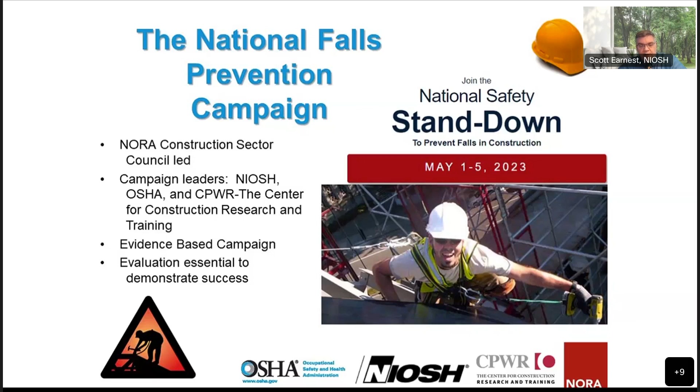It's an evidence-based campaign, and we also conduct periodic evaluations to evaluate various aspects of the campaign, and we follow an approach that looks at the levels of the hierarchy of controls.

Construction workers sustain high numbers of fatalities and injuries. Construction represents about 6% of U.S. workers, but 17% of occupational fatalities, the largest number of all industry sectors.

The Falls campaign began in 2012 when the Secretary of Labor, Hilda Solis, gave remarks at an event in Los Angeles. The campaign slogan is 'Safety Pays and Falls Cost.' The tagline is 'Plan ahead, provide the right equipment, and train everyone.'

This slide shows one of the first posters that we developed for the campaign up in the right-hand corner. We encourage construction employers to join the national campaign to prevent falls in construction and hold their own stand-downs.

A safety stand-down is a voluntary event for employers to talk directly to employees about safety. Companies can conduct a safety stand-down by taking a break to have a toolbox talk or another safety activity, such as conducting safety equipment inspections, developing rescue plans, developing job-specific hazards.

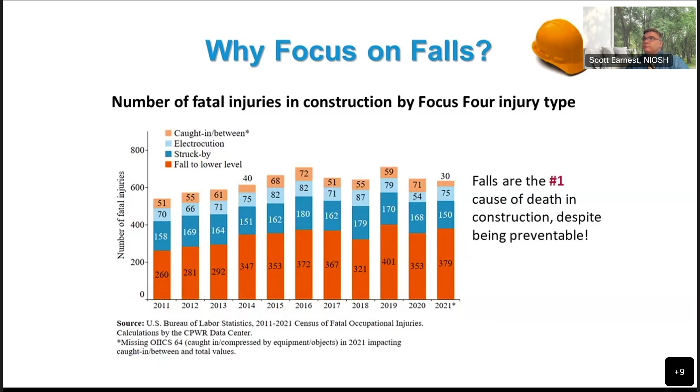Also wanted to briefly mention OSHA's top 10 list of violations. This is the list from 2021. The point I wanted to make is that if you look at this list year in and year out, it frequently includes various violations related to construction falls.

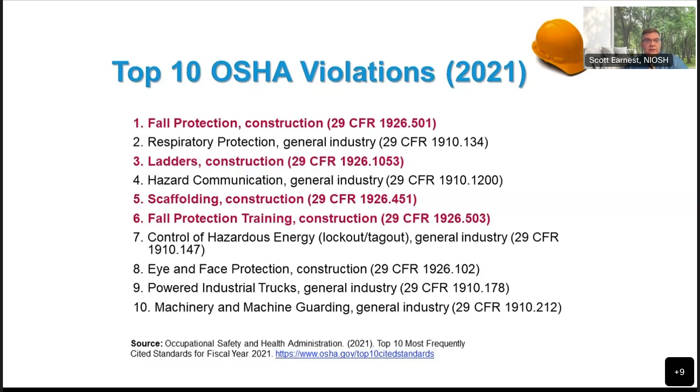In 2021, the #1 violation was fall protection, violations of 1926-501. #3, violations related to the use of ladders, 1926-1053. Fifth violation, scaffolding. Sixth violation, fall protection training. So again, year after year, there continues to be problems within the industry and violations of OSHA standards.

Now I wanted to talk a little bit about prevention through design. Prevention through design is a comprehensive approach for addressing safety and health issues by designing out hazards and minimizing residual risk.

The prevention through design mission is to prevent occupational injuries, illnesses and fatalities, and exposures by eliminating hazards and minimizing risks to workers in the design and redesign of facilities, work methods, processes, equipment and tools, and products, including new technologies.

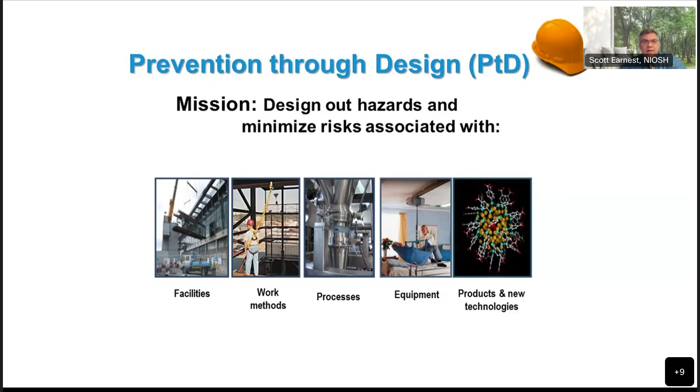The aim is to eliminate hazards and control risks to workers at the source, or as early as possible in the life cycle of a workplace. The impact of project planning and design has been found to influence safety on construction sites. Studies of injuries and fatalities suggest that many of the reasons for incidents can be traced upstream from the building process itself and are connected to planning, scheduling, and design of the facility.

The NIOSH director, Dr. John Howard, said anticipating and designing out hazards in tools, equipment, processes, materials, structures, and the organization of work is the most effective way to prevent occupational injuries, illnesses, and fatalities. And this is supported by studies.

In 1994, Jeffrey and Douglas reviewed construction industry safety performance in the UK and concluded that 35% of the site fatalities reviewed were related to falls and could have been prevented through design decisions. Using OSHA and NIOSH fatality reports from 1990 to 2003, Professor Mike Behm linked design to fatal injuries in 92 of 224 NIOSH FACE reports, or roughly 42% of the total.

And in a study of the relationship between design and work-related injuries in Australia from 2000 to 2002, Driscoll found that there was either a definite or possible connection to design in 63% of the 43 cases reviewed.

This next slide, and the next several slides, provide some examples. This is a photo taken by a former colleague of mine, Matt Gillen, that shows a worker servicing a rooftop heating, ventilating, and air conditioning system. It's an example of why prevention through design is needed. This worker's on the building edge with a clear fall exposure.

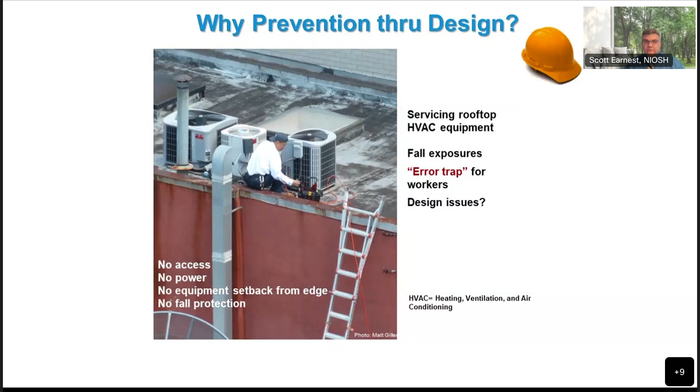This partnership resulted in U.S. industry-wide efforts to design, lab test, field test, and validate engineering control modifications to highway class paving machines to reduce exposures. The industry partners signed a voluntary agreement with OSHA to include these ventilation controls on every U.S. manufactured highway class paver, affecting the whole industry. This is an example of prevention through design using equipment.

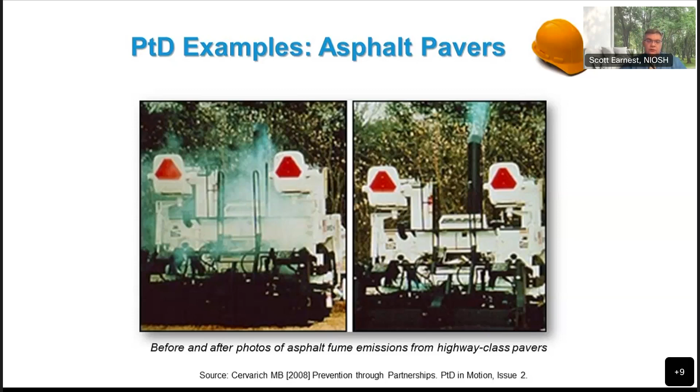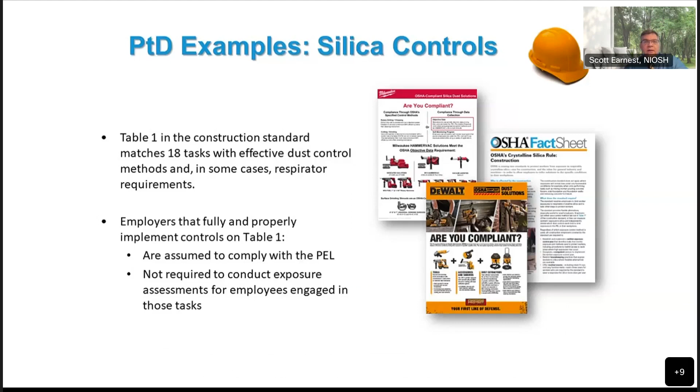Another example relates to silica and the use of powered hand tools. OSHA developed Table 1 of the silica standard based upon silica control research. This table provides a list of control options to reduce hazardous silica exposures for 18 different tasks. This is a popular table now and will likely be expanded. These controls are now being implemented across the construction industry. It's another great example of PTD that's resulting in fewer hazardous exposures.

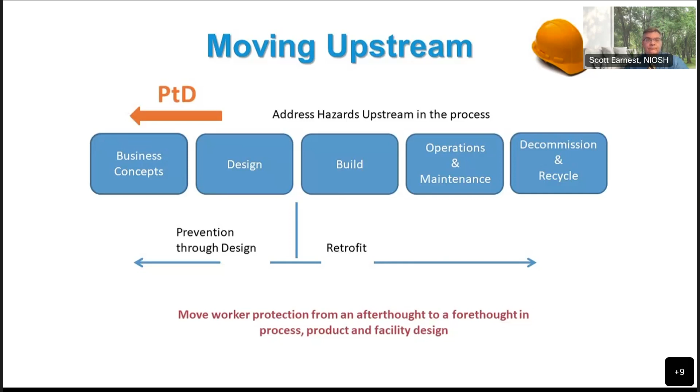I also wanted to mention that prevention through design is not new. Believe it or not, it was actually mentioned in the Bible, Deuteronomy chapter 22:8. It says, when you build a new house, you shall make a parapet for your roof, so you may not bring the guilt of blood upon your house if anyone should fall from it. I think this was written in 1406 BC, obviously a really long time ago.

Prevention through design is also widely used in many other countries and has been regulated for 30 years in the United Kingdom. It's also sometimes referred to as safety in design, inherently safe design, construction design management, or design for safety.

So what's the motivation for PTD? Well, PTD is consistent with the hierarchy of controls and targets the two highest and most effective levels of the hierarchy. At the top, the most preferred approach is to eliminate the hazard or exposure by designing it out. If this isn't possible, the next approach is to substitute a safer alternative. This is followed by engineering controls to isolate or guard the hazard, and continuing downward. The next is administrative controls, followed by the least preferred, personal protective equipment.

Another motivator for me personally is the issue of falls through skylights. NIOSH published an alert 30 years ago on this problem, and it remains a problem to this day, and it's preventable. When the alert was published, there were 8 fatalities from falls through skylights in just a period of a couple years. With that, I'll go ahead and turn things over to Bill Wright, Communication Director at CPWR.

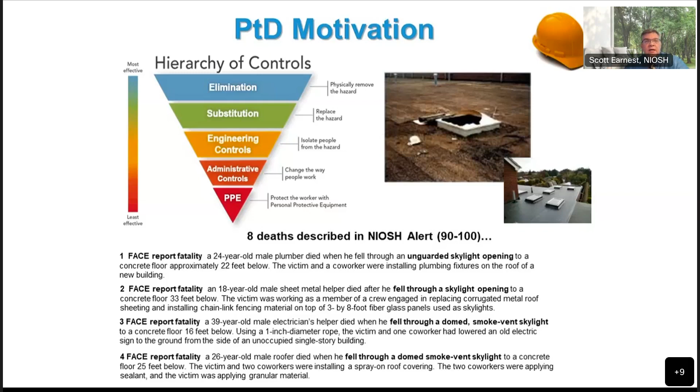Thank you, Scott. Scott's laid out really well why CPWR is interested in PTD and why it fits so well with our mission of preventing injuries, illnesses, and fatalities. And given what he's laid out, you can see the benefits of PTD.

We were curious, what's the state of PTD knowledge in the field? How are people using it? And what are the barriers to broader adoption, since it is such an effective way of keeping workers safe on the job? To investigate that, we did some research about a year and a half ago. There were really 2 parts to it.

One was a quantitative survey we did with our colleagues at Dodge Data Analytics. They have a really good pool of pre-construction professionals, architects and engineers. So we designed a survey to ask them some questions about PTD. And then to complement that, we did interviews at CPWR, led by my colleagues Babak Memarian and Sarah Brooks, to go into more detail to see what kind of enrichment we could get out of the quantitative study through these qualitative interviews.

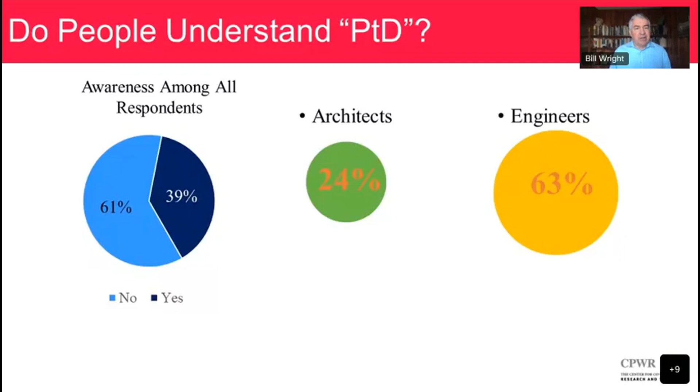First thing we wanted to know is, how do people understand PTD? Or maybe put a different way, do people understand PTD? You'll see that the pie chart on the left says awareness among all respondents. What we did was we read a definition of PTD from NIOSH, very similar to the one that Scott read a few minutes ago from Dr. Howard. When we read that to the pre-construction professionals, and when you see numbers in this presentation, those all come from the quantitative survey, you'll see that only about a third of the people were aware of that definition. And there was some variation between architects' level of familiarity and engineers.

In the interviews, we decided we wanted to know a little bit more. So we actually asked people to define prevention through design. I'll give you a second to read what they said, to give you a sense of the different approaches or the different concepts people have for this idea.

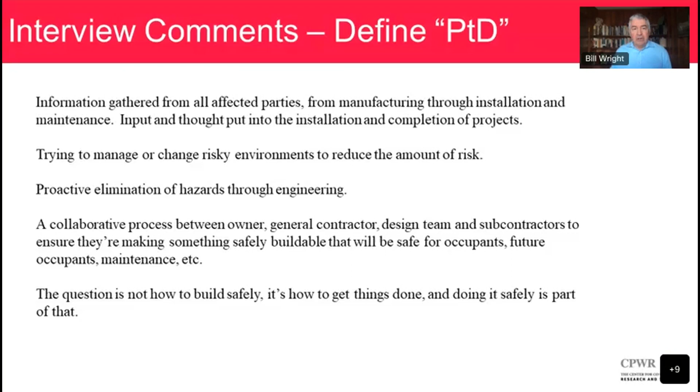As we were preparing to do this research, we realized that we didn't really want to get hung up on language. In other words, maybe people are using PTD, they just don't refer to it that way, or as safety by design, or some of those other phrases that Scott mentioned a few minutes ago. So we wanted to ask about some specific practices that would count as PTD, but that the people we were surveying might not necessarily make that connection to.

So we identified, you can see there's 5 topics, 5 approaches on the left. And we asked, well, do you use these techniques, to the engineers and to the architects? You can see that either sometimes or frequently, several of these are quite often used.

If you're wondering why there's a separate column for engineers, one of the differences we noticed in the responses to the quantitative survey was that in the first topic, identify opportunities for prefabrication, there wasn't much variation between the architects and the engineers. But in the 4 subsequent choices you can see there was a noticeable difference, that the engineers were more likely to say this is something we try to do when we're creating a building.

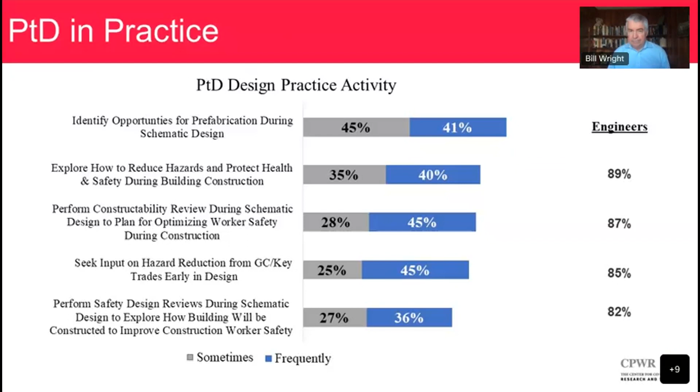One of the other pieces of data we got was comparing what people said they did in terms of using PTD versus when we asked specific questions about those 5 approaches. Particularly among architects, there was a big difference between what people said and what they actually did—the actual use was much higher, which was encouraging, especially if we're trying to encourage more use and people are already adopting some of these methods.

One other thing I want to mention, and you'll hear more about this shortly, is that we asked in the interviews what sort of PTD techniques people use. Falls protection was the primary one, showing up more often than anything else. We also got several mentions of prefabrication, so people did have specific answers about how they were approaching PTD.

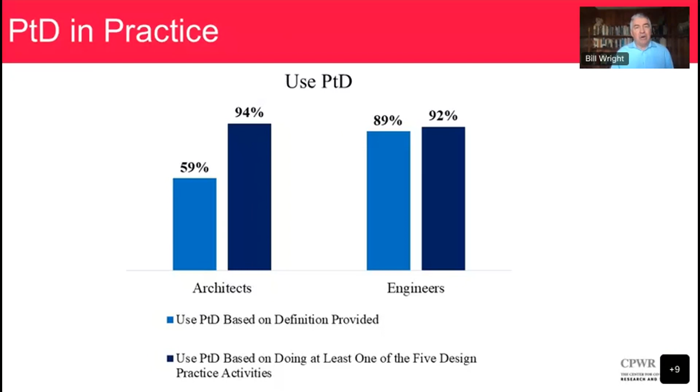Given that PTD can be really effective, we wondered what the barriers and obstacles to broader adoption are. You can see here how architects responded versus engineers. Let me give you a minute to look at these. You'll see that while there's some variation, there's a lot of overlap between the barriers for both groups, particularly the mention of liability, which people also volunteered in the interviews.

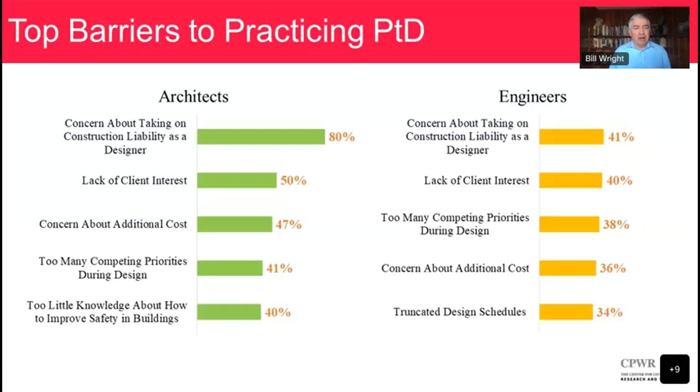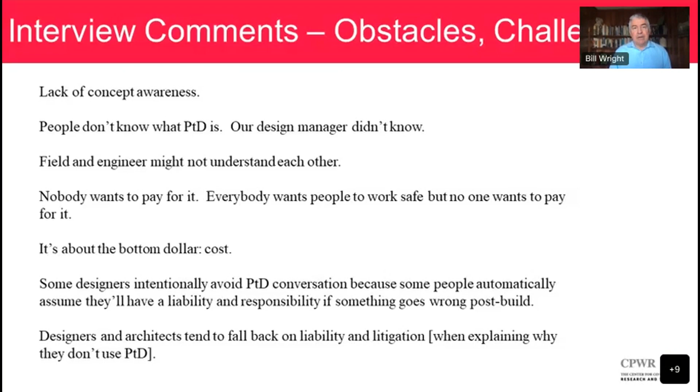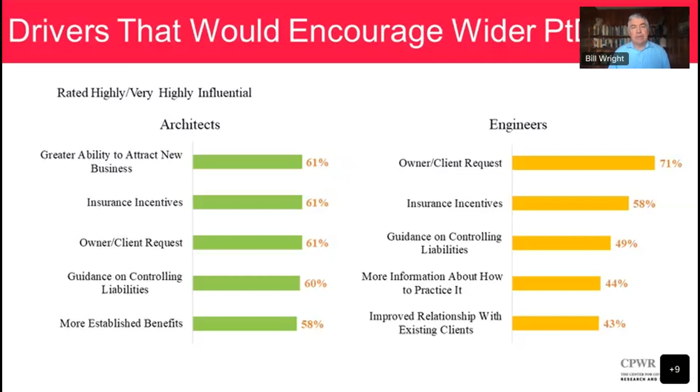Finally, we wanted to know what people thought would help encourage PTD use. I'll let you read this for a moment—the answers aren't very surprising given what we've learned from our research over the last few minutes. But the theme is that people really want to know how this is going to benefit their work, which is understandable, and that can take a bunch of different forms.

That concludes my presentation. Happy to answer questions when we get to that part of the webinar, but let me now pass it to Bob.

Thanks a lot, Bill. I'll introduce myself a little bit. I'm the manager of health and safety by design for Jacobs Engineering. It's my job within Jacobs Engineering to champion safety in design so that we can allow construction to be safer as we go through our design builds.

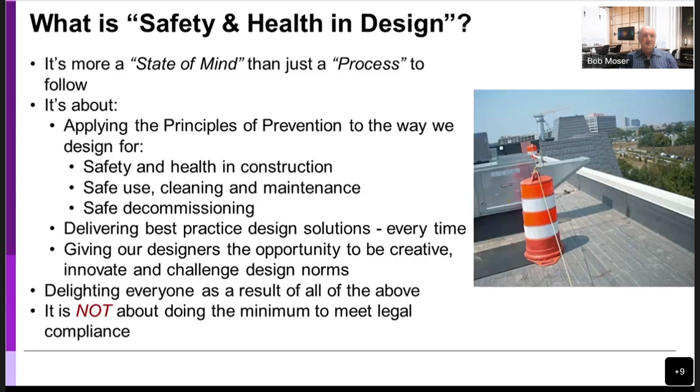Like for instance, in the parapet example, designing a proper high enough parapet to protect the personnel that would be working on that roof. And also to be able to get that parapet in at a time and schedule to where you're going to help the construction personnel not be able to fall early on in the project rather than later in the construction.

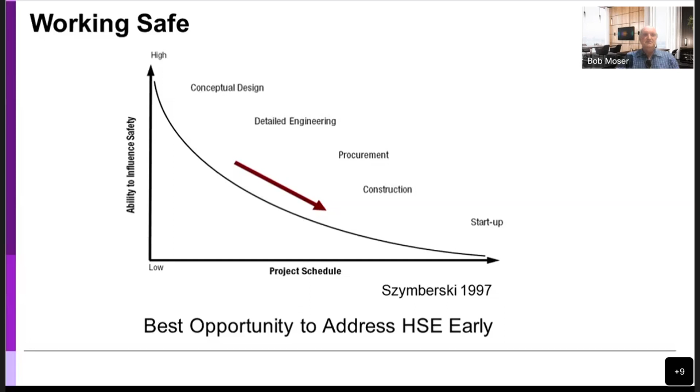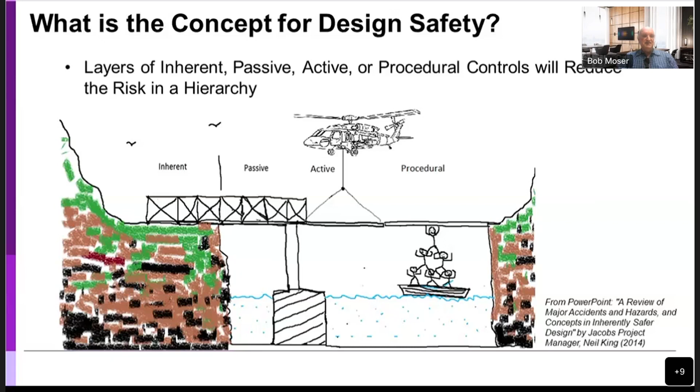So a lot of times in fall risk, a lot of the protection is within the procedural realm. Like you have fall protection that you're wearing - you can put that on wrong, you can make a mistake. So that's why procedural controls are not quite as good as the active, the passive, or the inherent. So this is something to think about when you're actually designing, because it allows you to see if you can get it more over to that left side of the inherent type safety.

So a lot of times, protection through design and inherent safety and health and safety by design, those are concepts that are wonderful, and we like to be able to do those concepts, but a lot of people always ask me how. Well, how do you do it? So I can give you some examples within our company of exactly how we make sure that we're designing for safe design down through the construction phases.

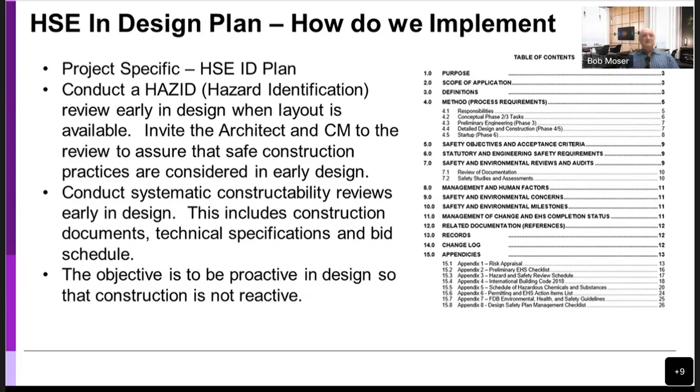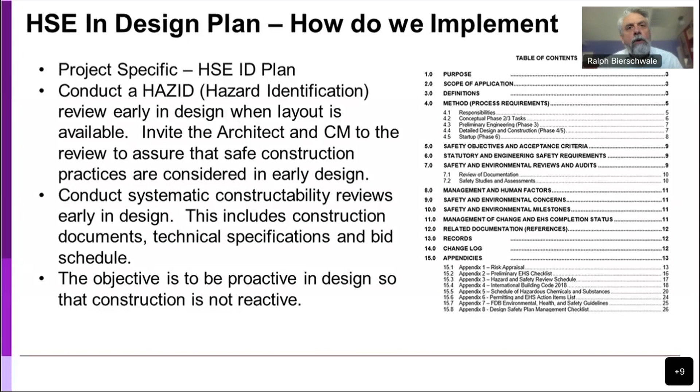Thank you, Bob. So Bob and I work at an architectural and engineering office in Conshohocken, Pennsylvania, focused on the life science business. So our projects are primarily based on pharmaceutical manufacturing buildings, which includes warehousing, laboratories, office buildings, and other support buildings like shops and things like that. So commercial construction is what we're typically focused on.

A lot of our clients have a strong safety culture, and we bring our own safety culture to it. So there is often support within our community to continue to advance and improve our safety culture. Within the company, we talk a lot about design with the end in mind, with the idea that we're thinking about the people who are going to occupy the building and occupy it in a safe manner, be able to maintain it, access things and the like.

In putting this presentation together, I thought we should also be thinking similarly about designing with construction in mind and how we can make the environment for contractors safer as they're building the facility. So as Bob just mentioned, we make hazard identification part of our normal design planning process. And that means, what does that look like?

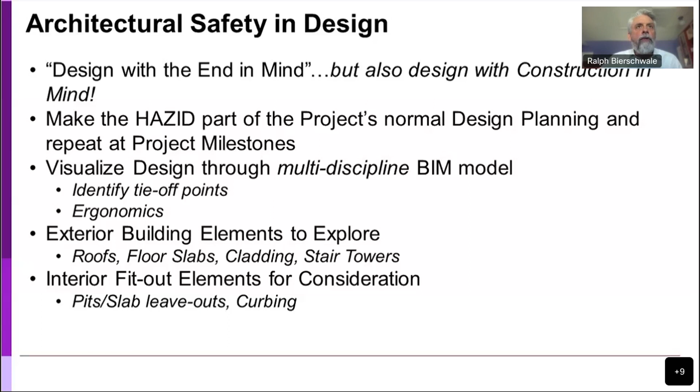So what I'd like to explore as some examples, brief examples, are exterior elements and some interior elements, and I'll explain as I continue. So, I'll continue beating the parapet, but parapets are important, and there's a lot of ways to prevent falls. You can have railings, you can have tie-offs, but the parapet is the gold standard.

And if you look at building codes, they're not uniformly the same. OSHA likes to see 42 inches for a parapet, but you're not always required to design to 42 inches. We do because that's really what you want to do.

If you understand how a roof is designed to allow for drainage to work properly, roofs, even flat roofs, have pitches to them. So the parapet actually needs to be 42 inches, ideally at the high point of the roof. There are places where the parapet might be considerably higher, but at a minimum it should be 42. In the design process, it's very easy to lose track of that. You could make it 42 at a low point, and then you'd have a lower parapet in areas where you don't want it. It's a simple mistake that people make, and I think it's an important one to be wary of.

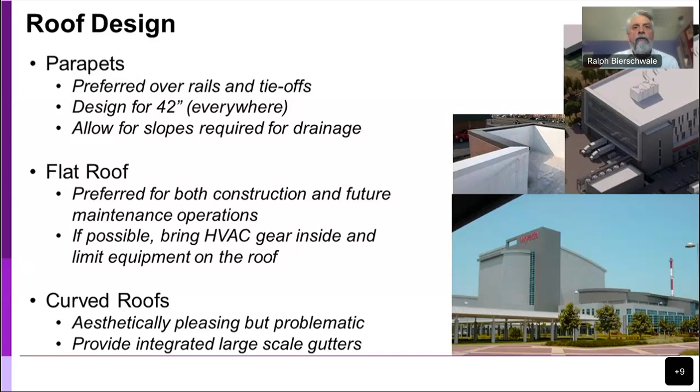We went to flat roofs after that. So, another example that I wanted to bring up, and this doesn't work for every building typology, but for elevated slabs, this may be more in the category of tripping and falling rather than falling from height.

But there are significant risks associated with pouring slabs on elevated levels. Metal deck itself, rebars, studs, pouring concrete, dealing with shoring - all of those things, as you can imagine, walking in wet concrete represent falling risks, especially if you're at the building's edge, but even in the middle of the building where these workers are working, for instance.

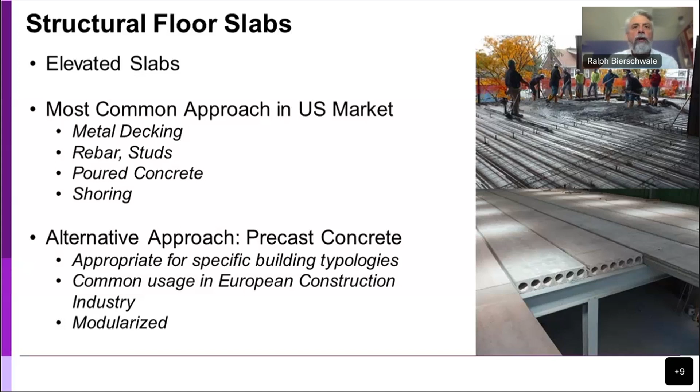An alternative approach for certain typologies is to use more precast elements, and that was one of the themes that we saw earlier on in the presentation. We see more of this in our European operations. We do work all over the world, and they're more likely to be using concrete elements like the ones pictured here. They're used often in office buildings, hospitality work, and the like. Less so for manufacturing buildings that we're involved in, but certainly some of those buildings could be done in a more prefabricated way, as is illustrated here.

And so again, going back to the methodologies of construction, oftentimes we look at using insulated metal panel and curtain wall, and those are often stick built. So you're putting up girts, going floor to floor. There's a lot of work at the building's edge, with a lot of people in bucket trucks and things like that.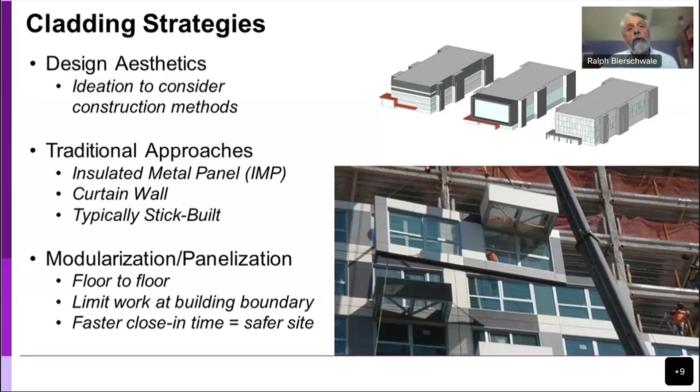Lately, along with our construction managers, we've been working with industry to do larger panelized facade elements that can be delivered on site, secured quite quickly, and improve both our schedule and our close-in time. The sooner you get that building closed in, the safer the site's going to be, the less work you have at the building's edge from both inside and outside. I think this is becoming quite a common practice, and it certainly is to be encouraged.

So a modular stair tower, this came up in a construction review of a project that we're working on currently in North Carolina. It was a clever idea to modularize the exterior stairs and deliver them so that we wouldn't have to have scaffolding on the building's edge prior to the stairs being built on site, stick-built or otherwise. An important thing to take into account here is schedule.

This was a really smart idea, but our prefabricator wasn't able to get the stairs there as early as we would have liked, so there was scaffolding and then there was a stair. It's important to schedule things like the stairs to arrive just as the steel arrives, so that you can have the safest possible way to get to elevated slabs rather than using temporary structures.

Along a similar theme with regard to stair towers, we like to include windows in the stair tower itself. Even after you've clad the stair tower, oftentimes it takes a while until permanent lighting is put in, so temporary lighting can give you lots of weird shadows, and sometimes it's not put in on time. Windows in the stair tower provide an added layer of natural light to help you see where you're going.

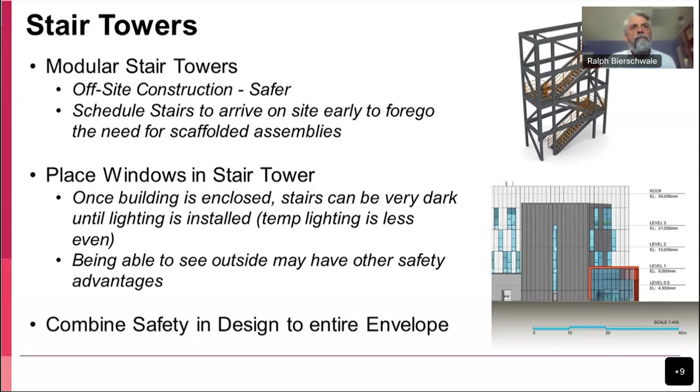As you go into the building further, there are some industrial-type details I wanted to point out. One is pit-mounted equipment like scales. We encounter quite a number of these in any of our installations to weigh IBCs or other materials coming into a warehouse or into a production room.

These can be either pit-mounted, flush with the floor, or they can be placed on a floor with a small ramp on them. They both have their advantages and disadvantages, but we prefer to put them onto the floor so that the pit itself doesn't become a tripping hazard during construction and a cleaning problem later on in design.

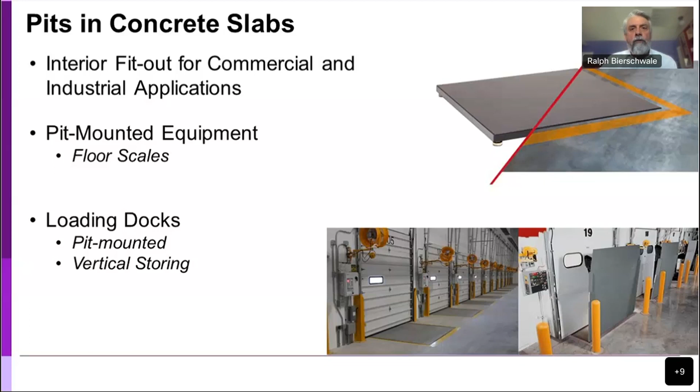In operation, if the door opens up, you have a 4-foot fall to the outside, whereas the vertical storing leveler on the right—even if the door was opened inadvertently—would prevent you, and certainly a fork truck, from falling off the loading dock, which is a common problem.

We've been more and more ordering equipment this way to prevent that small amount of extra tripping that can happen after the fact during maintenance operations.

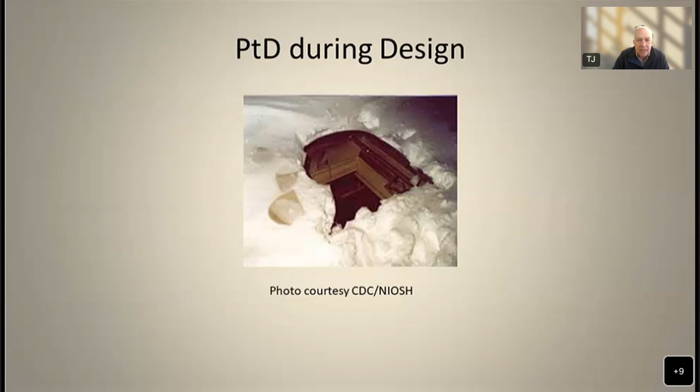So again, any examples you're looking for on better ways to do this, please let me know. But they now make skylights in the United States you can't fall through - step one to getting ahead of people getting hurt.

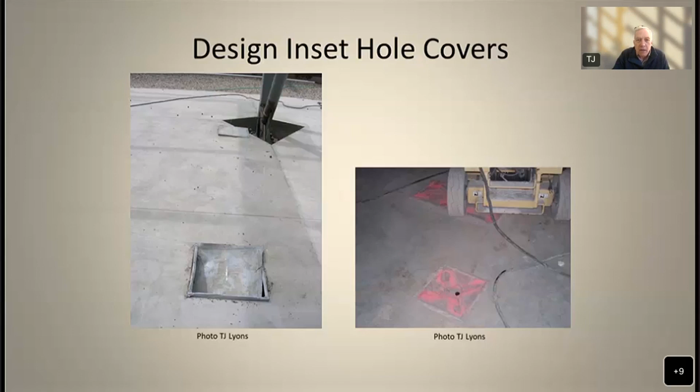Some of these interventions are fairly simple, but going back to earlier conversations, you really do have to be involved in the design phase of a project to make this work. But once the subcontractors and the people putting the building together understand it, it's just a great way to do it - it goes a whole lot faster, and there's absolutely no maintenance on this compared to a regular hole cover. They'll listen very closely. It's just another example, this one on a steel deck - it's put in place, and this thing is not going to move.

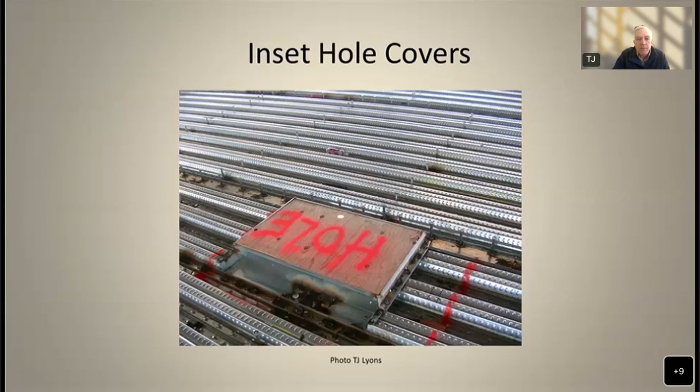Very well thought out. This is planning at its best, and this is also prevention through design at its best. Now you're going to see a few more examples of exactly this - things we need to start putting in the contracts and the additional provisions, as we used to call them, so the contractors know what's expected versus trying to change their habits halfway during the project.

One of my favorite stories - we talked about a slope roof earlier. This is an aircraft hangar on an Air Force base I was working at, and the contractor was very worried about how they were going to fall off the roof, and they were going to buy about $22,000 worth of fall protection gear. And I said, well, aren't you guys going to point up the building? This is a concrete stone building. Yes, we are. I said, well, if you're putting up scaffold, why don't you just put the scaffold one layer past the rooftop? It was incredible - we ended up winning an award for this.

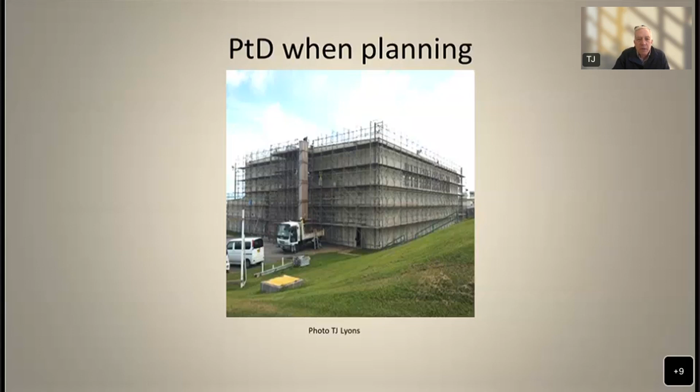But again, some of these interventions aren't necessarily things - it's how you put the work together. Prevention through design isn't just something to look at early in a project as far as how the building's going to look, though I'm a big fan of full parapets, and probably more on that later. It's actually about how you put the work together. You can really prevent a lot of injuries by just simply looking at how we do the work, because we have to do it differently to kind of win the war. In falls in particular, we're not - but some of these simple interventions where you can't fall off a building and do the work probably two or three times faster, that's what's going to save some lives in the construction sites here in America.

One of the cool things about PTD, and this is again why I enjoy it - there's not a lot of cost in many of the things we do to make it safer.

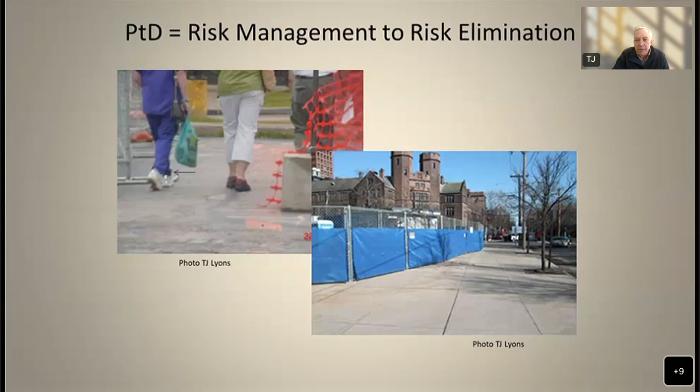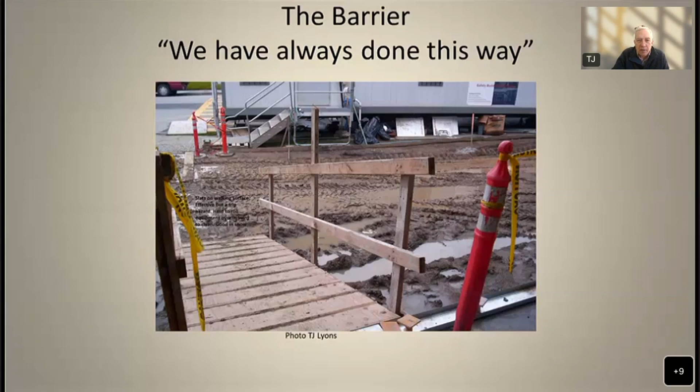When I hear, hey, we've always done it this way, I typically listen a lot closer. This is a really nice ramp - I took this picture in California on a great site. But again, as you get on here, people are going to trip, and you can't push anything with wheels across it, right? This was a good idea at the time, maybe 10 or 15 years ago. But there are some new products I want to share, new approaches to things we should be doing on every site. Again, if you put these simple interventions in a contract, a construction project contract, and make sure it's bought out by that particular contractor, the carpenter, whoever, you will really find a great advantage in eliminating a lot of the falls and trips on your projects.

Very few people are aware of this unless you're on very large projects like a Google or some of the Jacobs jobs, but the material on the right is something called Skudo mat. Skudo looks like a Scotch-Brite pad - you can't slip on it, period, and that's what I love about it. It comes in sheets or rolls. The photograph I took on the right, I took in Nashville on a very cold morning - that's frost on the steps. If that treatment had not been on there, the first person off those steps would have probably fallen, right? There's no reason he wouldn't have.

When you put this material on, which is fairly inexpensive compared to a fall, you move from risk management, which is when you put up a sign that says watch out, slippery steps, to risk elimination, where you eliminate the hazard—something we truly need to spend more time doing in construction.

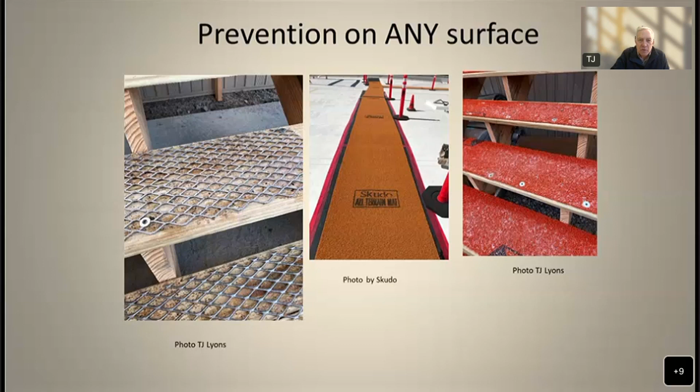Now on the left-hand side, something we've been doing for years, right? This is stamped metal—you put it on ramps, you put it on steps. There's no way you're going to slip on this step, but if you maintain it, which is important, you can eliminate falls from any of these surfaces. What I'm advocating, by the way, is across the board: if somebody has slipped on something once, they're going to slip on it again.

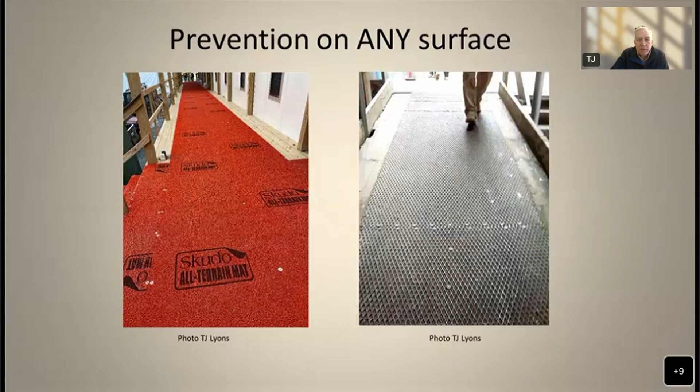And when you put it on the right-hand side, like on a ramp at a construction site—this is in New York—you've really moved along and you're setting the standard for preventing falls by how you design the workplace and, in fact, the working surfaces that we ask people to work on. Just two other quick ones here.

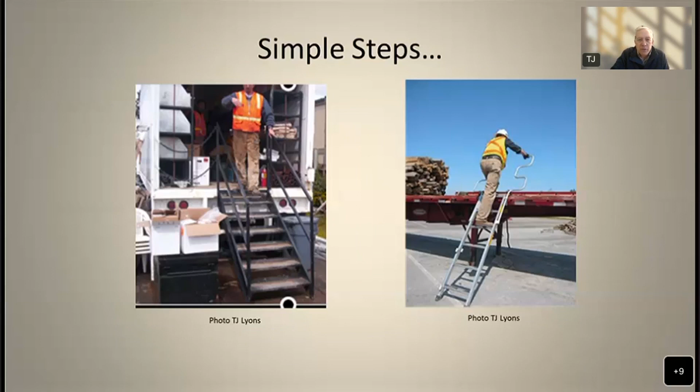Very common, but something we don't think about until somebody falls off a flatbed loading steel or off the back of a truck used to store materials on a work site. The ladder on the right actually came from the truck driver—he brought it because he had fallen off a truck in the past, so he brought his own ladder. They're made in Arizona, if anybody's interested.

Something I'm a huge advocate of—coming up with the idea of 'ladders last' years ago—is getting them off the workplace. On the left-hand side, if you're the first guy up in the morning with muddy boots, everybody else going up there gets mud on their hands.

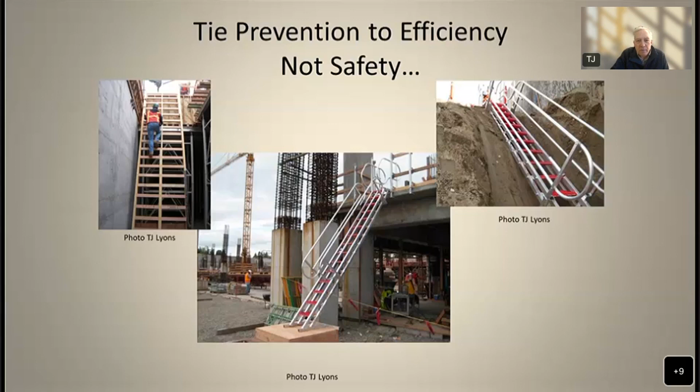But these ladders on the right-hand side, either for excavations or getting to upper levels, let you move folks about two times faster. You can go up with a lunchbox. They're reusable, recyclable, and you can get LEED points for them on construction sites. If you can get LEED points for something on a construction site and it's safer, it's a win-win for the people building these buildings and also for the owner.

One of the last tips I have—too clever, too simple, too easy—I found this in California. When you're walking across rebar mats, you tend to have to watch every step you place. What they started doing here is putting down what's called a sidewalk screen, a very lightweight screen, so you can walk across the surface. When I interviewed the folks working on this project, they said they were working about twice as fast because they didn't have to watch where they walked.

Again, one of the things we really need to get ahead of is 'we've always done it this way'—we need to think about how we should be doing the work, especially in the interest of keeping that worker safe from a simple fall.

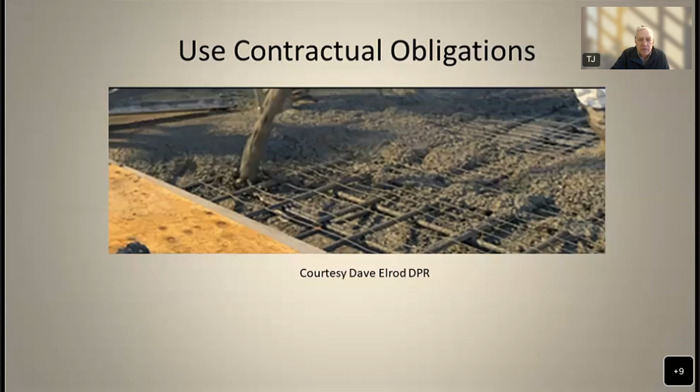Last, one of my favorite examples: on a project where the site was about an eighth of a mile away, we paved it—so they had a nice, easy way to get there. They're not going to slip on the mud, and they're not going to bring mud into the building. It's a simple process. Again, if anybody wants details on this, let me know.

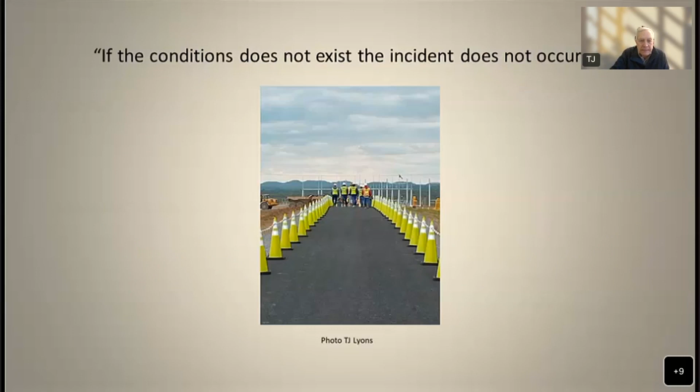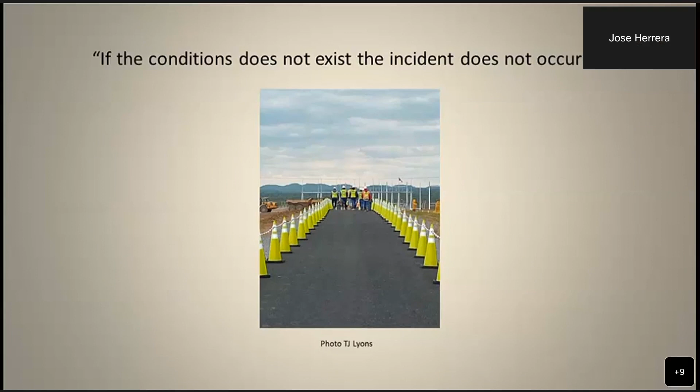Hello, my name is Jose Herrera. I work with the Directorate of Construction at the National Office of the Occupational Safety and Health Administration, and I'll be presenting some resources available on OSHA's website and from our counterparts who have gone through great lengths to draw attention regarding prevention through design.

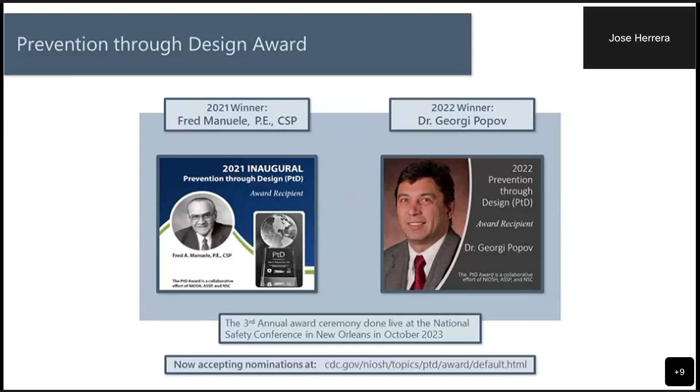NIOSH developed the Workplace Solutions series as useful job aids to put ideas into practice, such as preventing falls, designing out hazardous noise, and a general guide to demonstrate the business value of prevention through design's hazard control.

NIOSH has educational slide decks available also. These can be downloaded for free by anyone. They include many photos and instructor notes. Here are a few examples: architectural design and construction, structural steel design, mechanical, electrical systems, and reinforced concrete design.

NIOSH directly contributed to prevention through design chapters, homework problems, and case studies to over a dozen key textbooks. And it's encouraging to know that many more textbooks are including PTD methods and principles.

Research establishes the value of adopting PTD interventions, addressing existing design-related challenges, and suggests areas of future research. The research focuses on design factors that effectively reduce occupational injury and illnesses by collecting and analyzing data that assesses the impact of these prevention through design factors, as well as economic and business issues, such as financial analysis of PTD impact on the business process.

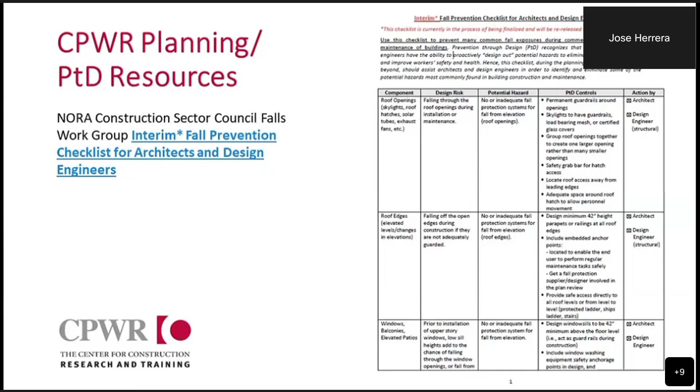CPWR has assembled planning resources that focus on fall prevention, fall protection, and fall rescue, and those are all available on stopconstructionfalls.com. A full written fall protection and rescue plan template is available in English and Spanish.

And for smaller contractors who may not have the capacity to complete such a large document, there are smaller and concise guides available.

And finally, we'd like to draw your attention to the fact that CPWR has a number of other hazard-specific planning resources that can be used by employers to think through risk reduction well before construction ever begins.

An example is the Best Built Plans program, which includes a planning tool and supplemental resources to help contractors plan to reduce soft tissue injuries from manual materials handling, from the bidding phase all the way through a look back at lessons learned.

CPWR also has a silica exposure control planning tool, a COVID-19 exposure control planning tool, and they are releasing a beta version of a planning program to prevent struck-by incidents in the coming weeks.